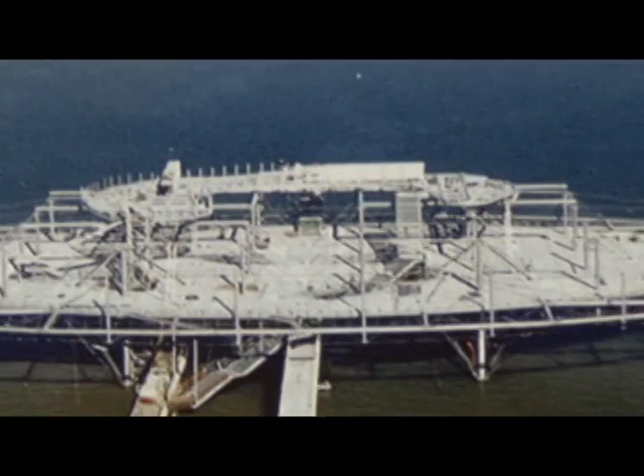Here is the structure, with the platform and the upper platform, which is the angel deck, with two long bridges, one bringing you there, one bringing you back. We built this on 4 columns, and it was super, super lightweight. This was kind of the building module, the fog nozzle. And this is the computer interface. This was really one of the first kind of smart projects that we did.

There was a weather station reading the actual temperature, wind speed, humidity level, dew point, all of that, and thinking in real time about how and where to put higher pressure, depending on the wind and depending on all these other environmental factors. As we taught it how to respond to the weather, it acquired an artificial intelligence.

Blur was a response, basically, to a culture that is seduced by the simulation of the real. We are a very tech-savvy studio, but at the same time we're not acritical. We really look at the function of technology, and in this case there were expos all over the world and World's Fairs that had super high-res, large simulations of the real, and that was a kind of point of pride, I think, technically.

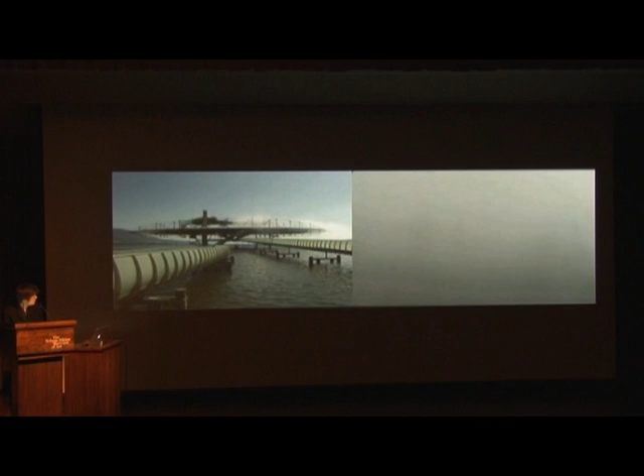So climbing, let's see, this is accelerated on the left, and kind of the sense that you have over on the right, and you occasionally can see a figure that's just emerging and then disappears again.

And you might ask, why? How did the Swiss allow you to build this? Like, why? I keep asking myself that. It was kind of an amazing moment.

When you approach, this project is making interesting contours out of slight shades of white. As you come up, this emerges out of blur, and you come up to the angel deck. It's a little bit like an airplane coming out of a cloud, and it felt incredibly liberating, with blue sky above, and then you could be swept by this cloud bank.

And it kept moving around. In fact, we kept being shut down by the various restaurants because all the food was getting soggy everywhere, and it was very, very hard to control, particularly in high moments of humidity.

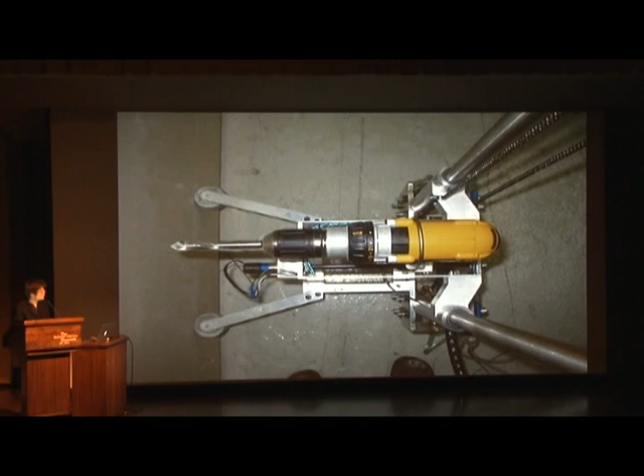And then there was this protagonist, this drill, which was just basically a hardware store drill, but it was put together with a really smart robot. These are the brains of the robot.

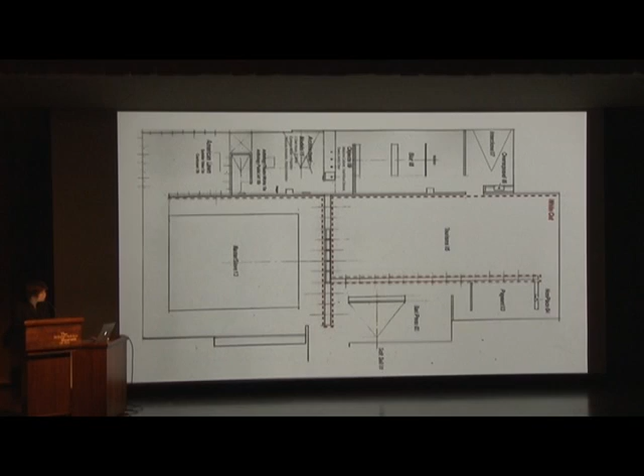This robot basically cruised the space, across wall to wall, around the walls, and it perforated its way through the whole show, and it undermined the integrity of the white wall. So here it is going through the space where Master-Slave is. Watch it in action.

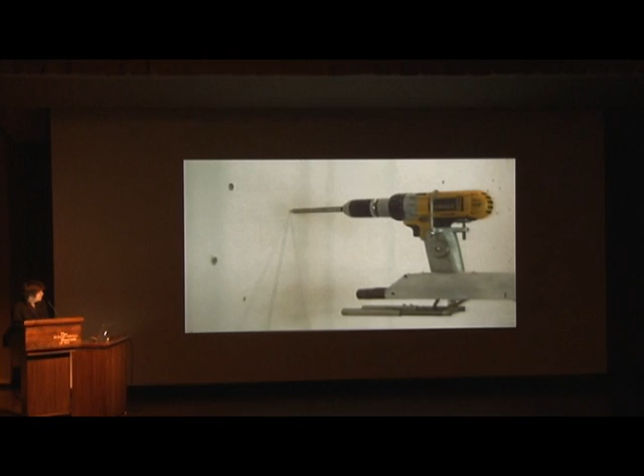An intelligent navigator randomly selected a point in this three-dimensional matrix of coordinates, a kind of mapping of the whole space. The drill moved to that point, pierced the wall, and left a half-inch hole before it traveled to the next location. By the way, we worked with Honeybee Robotics, who did the Mars driller, and we took some of their engineers off of their real work to do this.

This was particularly hard rounding these walls.

Initially, the holes were lone blemishes on these pristine white walls, and as the exhibition continued over 4 months, the walls became increasingly perforated. Eventually holes on both sides aligned, opening views between galleries, and clusters of holes randomly opened up sections of gallery surfaces. So this project was a kind of performance piece during which the wall was made increasingly unstable.

This is the very wall that we critiqued in many of our previous projects when we entered the museum or the gallery. So rather than securing a neutral background, the wall actually competed for attention, and the content of this exhibition was basically a kind of pretext for the subtext, which was this project that basically brought the white wall to light, the authority of that white wall, the acoustic separation, and it created this background drone which was incredibly infuriating.

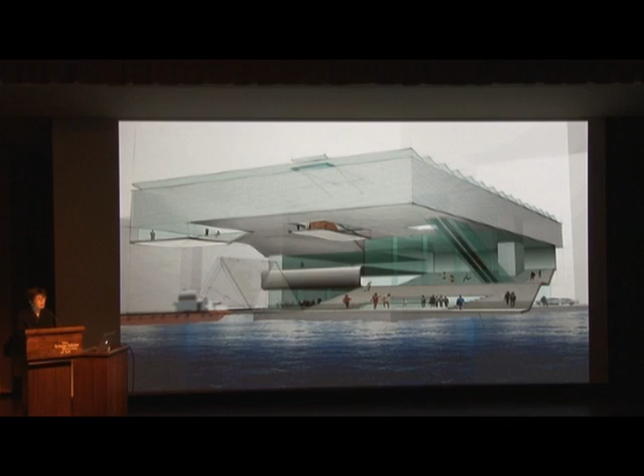Then all of a sudden, we were invited to speak in its voice. It was another one of those very important turning points in the career of our studio, where people of my generation were starting to get into places of power, and it was at that point we said, well, what is it that we are critiquing? They invited us in, so let's make a good museum.

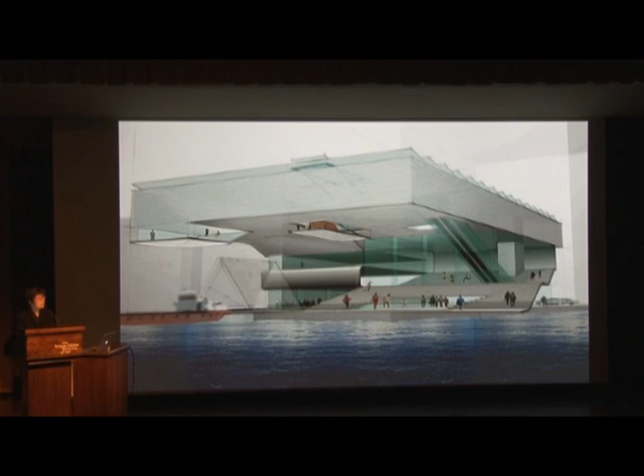So starting from being basically guests to being hosts, we were, for the first time, not thinking about misbehaving. We were thinking about how to make good gallery space, how to make it on budget, and all of that stuff. We think the ICA did turn out good. It was our first try at it.

It was about a 2-year design process, 2 years of construction. The site was on Boston Harbor, and this was the first new museum that Boston had built in 100 years. So it was momentous for Boston. It was in Fan Pier, and it's basically an empty site.

The ICA had traded in their site on Boylston Street, which is very central, and they had an urban site on multiple levels. They really, more than anything, wanted a gallery on a single level. This site wasn't big enough, actually, for it. They got it for $1.

So we did something that was very simple—I won't describe too much, but we basically lifted the gallery, which is this whole thing. It's the size that they needed, and we took it over beyond our site. This harbor front runs all the way around Boston, 47 miles of pedestrian space. We convinced the authorities to allow us to build over that space if we retracted our footprint below and made a space for the public to sit and also penetrate the museum in a different way.

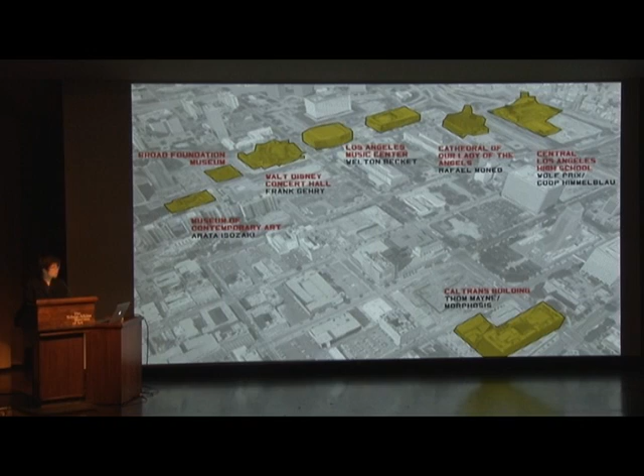So many have doubted that downtown LA can ever be reconciled, and many thought that the ultimate silver bullet in LA's urbanization would be Disney Hall - that the city could regenerate by this building single-handedly. And despite its success, and it's a really great hall, I was really interested to see the Kauffman concert hall as well today. It was a really beautiful hall, and there are many similarities.

This particular building didn't really succeed to catalyze a sense of urbanity downtown, and that poses a problem for our building. Like, what do we do in this context?

I think we realized along the way—our building is just to the left, just out here—that no single building could do it, that you basically have to be optimistic, and that when you do the right thing, and you bring a culture there, and you bring a public, good things will come out of it. And already we're starting to see some real activity.

But anyway, back to the design. So next to Disney Hall, what the hell do you do? This is the most daunting problem, aside from fixing LA. And this is our envelope.

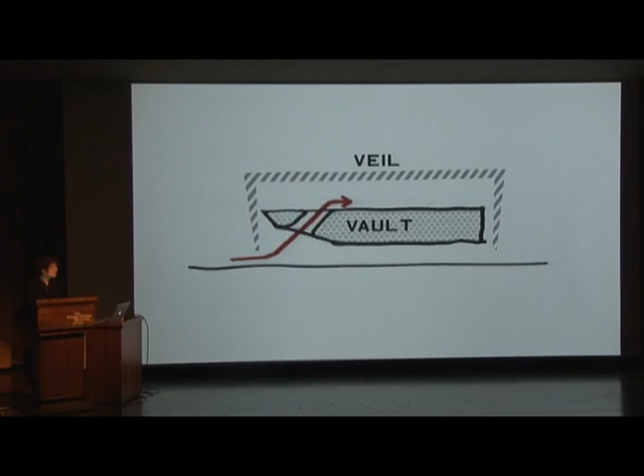We really like the idea of having this like a suitcase that gets unpacked on the surface, and then it gets repacked and put back into the vault and unpacked again in different ways. So there's something really, really interesting about having the collection right there and being able to pierce through it.

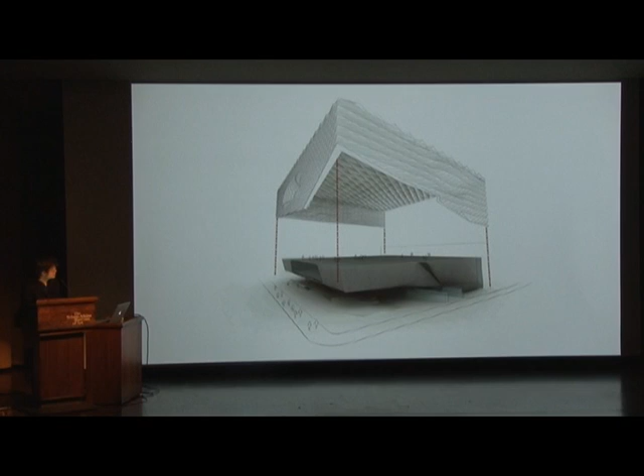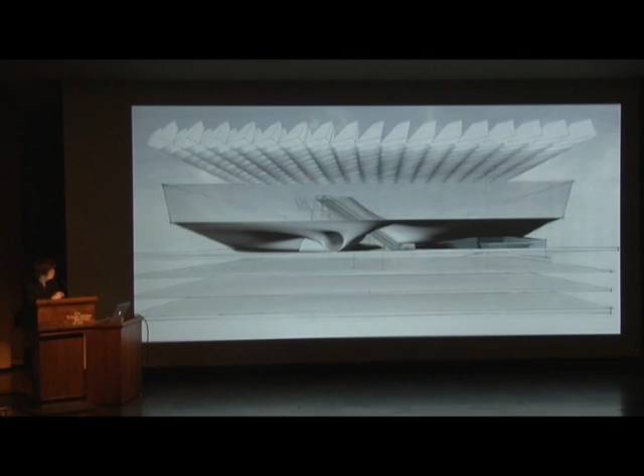So this is the diagram of the vault, and the vault is brooding, and it's solid, opaque, and the veil is all about bringing light and structure down. You could see the articulation is very organic here. This is the escalator that shoots you right through the vault under the skylight system.

And there you go, like bam, and you get up to the top, and that's Eli. I think that gave us the commission, putting him right in the middle of that. He's a man with an ego.

But the making of this vault is extremely complex and involved. First, we thought we could do it just with concrete, stressed concrete all the way, to make these very, very long spans. In the end, we ended up making it out of steel, clad in concrete.

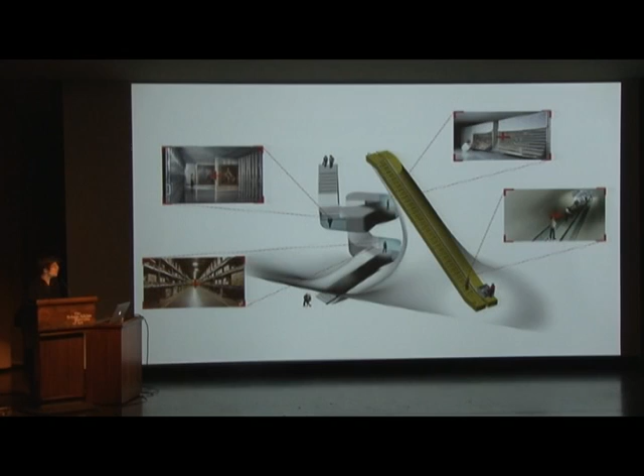This is basically the diagram of circulation. You shoot your way through, and then you come down, and you actually see the pre-curated work on your way down. And so we're interested in, after seeing the exhibitions, being able to understand that this is not a kind of general museum like the Nelson Atkins. It's a collection of one person, one sensibility, and it's really about that collection and that man.

And the outside is that kind of brittle structure. You could see right through it. It brings filtered light in a very, very soft way. This little piece goes right into, it's kind of submerged into, basically a lecture room that's also public.

Here is the vault, and that's that moment of intersection. It's a very hard thing to build.

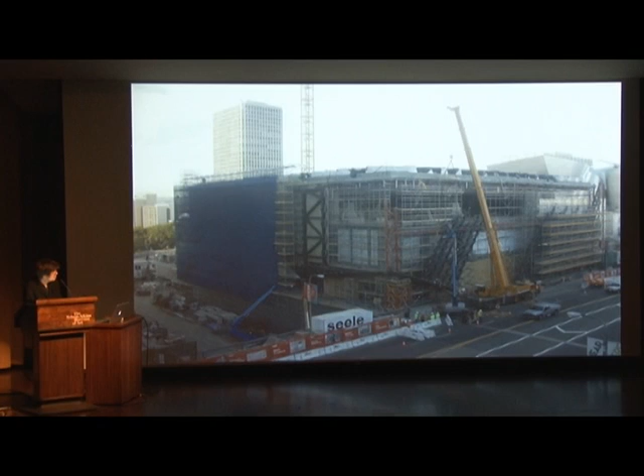Exits is a really important piece for us. It was a contemplation about human migration across the globe. This was shown at the Fondation Cartier in Paris, done in collaboration with Paul Virilio and a bunch of other architects, a statistician, a geographer, and so forth. It's based on the notion that home isn't what it used to be.

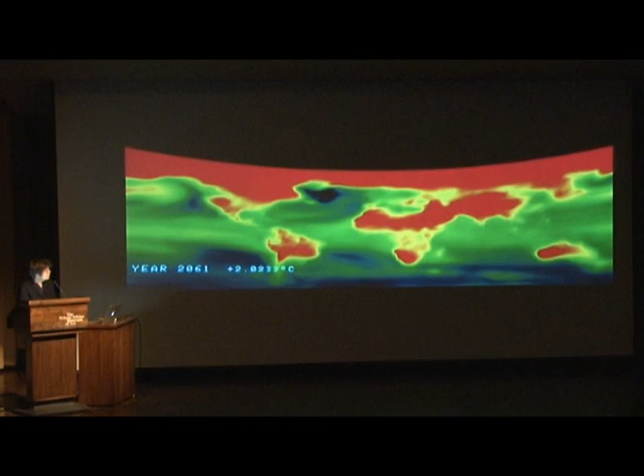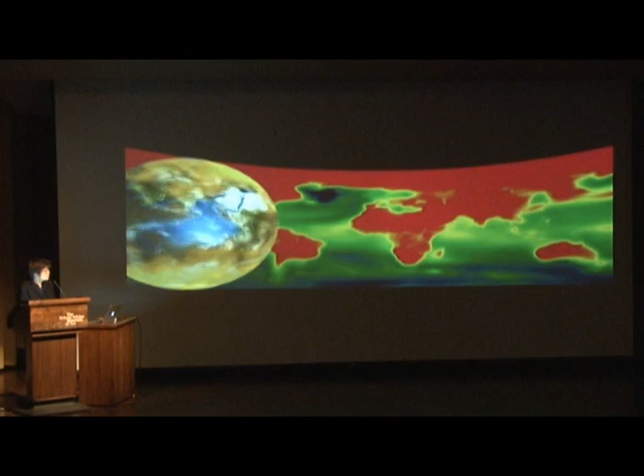This is really the potential of data visualization in the future, that you could see things you can't see with the naked eye. You can't see it even in still maps. But when you start to intersect conditions of politics and policy, environmental conditions, and social conditions, you start to see different kinds of patterns.

Okay, I'm just going to stop it there. Okay, I want to also now move into another kind of work, and this is the work that we've done in New York over the last 10 years. I'm going to try to go through this quickly because I can see that we're not going to make it in time.

Lincoln Center has been pretty much a 10-year project. Lincoln Center was planned in the 50s and constructed — shovel in the ground, I think, was '59 — and it was built out through the early 60s. We were invited here to start on the project, a very, very small project that eventually grew into a much bigger project. These were the guys that originally designed and built Lincoln Center, a kind of collection of celebrity architects. We came in and changed things around with a lot less testosterone than these guys.

The great thing about Lincoln Center is that it did something for the first time: it put all these cultural institutions on one campus. Many people thought that was a bad idea — it would basically create a kind of ghetto for the arts, and that it would be better to distribute the arts through New York. But what they thought was a problem, today we call synergy, and the new leadership of Lincoln Center is really putting all of these players together.

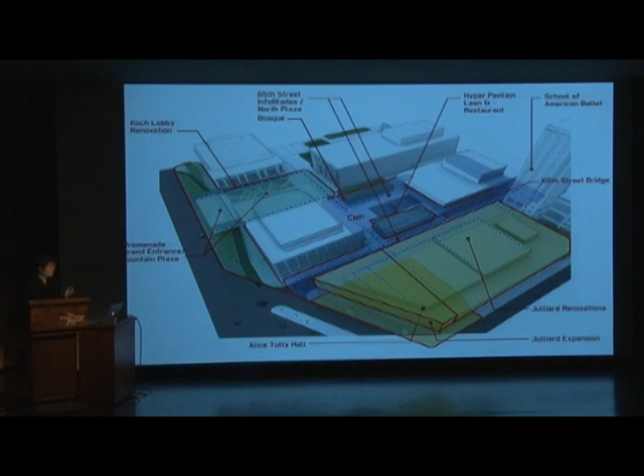Often there was no real program — it was just that we need to do something for the public. So it was kind of interesting working through this project.

I'm just going to show you quickly a lot of before and afters. This is the Juilliard building — said to be one of the great brutalist buildings in the country.

We were able to expand — this is the moment of expansion here, on a triangular site. We were able to extend Juilliard's top three teaching floors by about 55,000 square feet.

This is also an expansion of Juilliard, and here is an expansion of Tully Hall. Tully Hall was always underground, and there was really no lobby to speak of. We put it on display, expanded the lobby, and made it very public — this was super important to us.

And you could see some of the details — we kind of brought the windows across, made blind windows, added an extra floor, and made these strange prismatic windows.

On the other side, while one side was an expansion of the travertine facade, the other side was a kind of sheer cut on Broadway where you could see all of the stuff happening in Juilliard, almost like a section cut through the building.

I was telling this story to Joy earlier today — the students and faculty at Juilliard felt very much like they were in a monastery. They wanted light, they wanted a connection to the city.

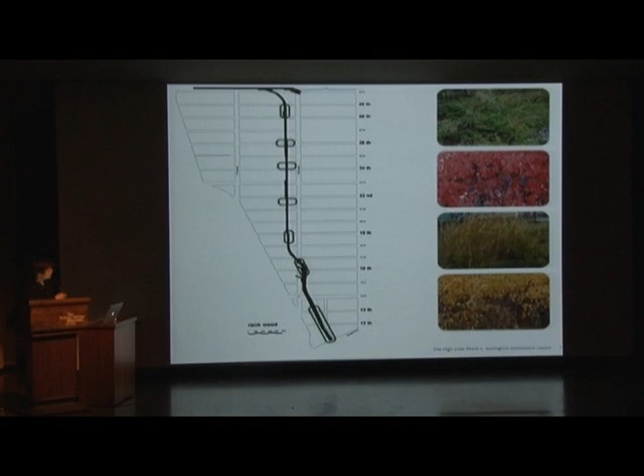What happened was that there were all these different sites, and some of them were windblown, some were surrounded by towers and kind of dark and wet, and some were flooded with sunlight. So there were all these micro environments that happened as a result of this kind of perverse urban condition that was changing all the way for a mile and a half. So you got like 100 different species that took seed there, and it looked really varied and interesting, all these different grasses.

So anyway, when we started to work on it, we were very interested in this opportunistic landscape. Problem was that the ballast was kind of toxic. We had to take everything out, take all the plants out and everything out of there, and we had to remediate the bathtub and some of the steel work and all of that to make it good for the next decades.

And when we did that, we had to figure out, how do we, we could seed it back, we could bring back those species, but how do we bring the public up there without ruining it? This was a big problem. It's very often very narrow there, maybe 24 feet in areas, even 22 feet. How do you avoid doing this — just a path and vegetation, which is the kind of obvious thing to do?

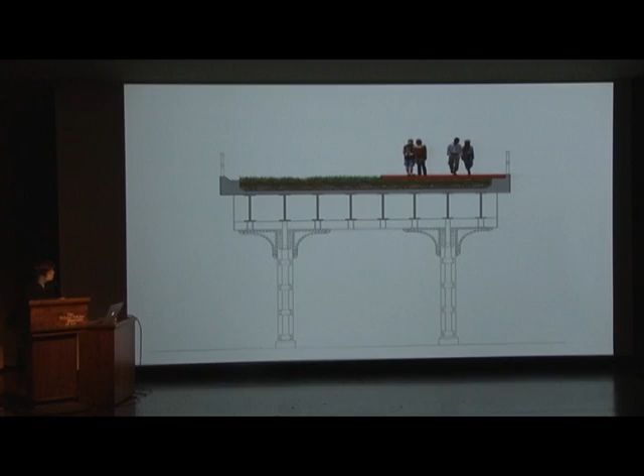So we got our stimulation, and by the way, I have to mention James Corner and Piet Oudolf, our collaborators on this. We were very stimulated by the way that these kinds of natural decay cycles happen in nature — overcoming culture, overcoming nature, overcoming culture — and could we reproduce something like this?

So we came up with this new paving system made of concrete pavers. They were very long and skinny, had tapered ends, which could comb into vegetation in different ways. We could assemble these pavers in different degrees to produce 100% hardscape to 100% vegetation, and any gradient in between.

We were also very interested in preserving the kind of melancholia of the site. We didn't think it was necessarily possible, but there was something very beautiful about this post-industrial site that had seen all this kind of change, this change of New York. How do you preserve that? How do you make up a place from which to see New York, where New York becomes on display?

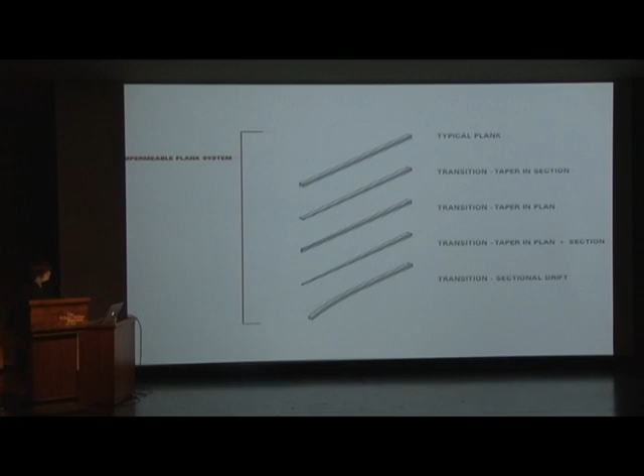These are some of the planks, there are many different types. You can see here that the language is very simple. Here are the planks, the way it kind of filters into vegetation, some of the tracks brought back. The language of the concrete pavers becomes the benches, the existing guardrails become the source of light. It's a very light touch.

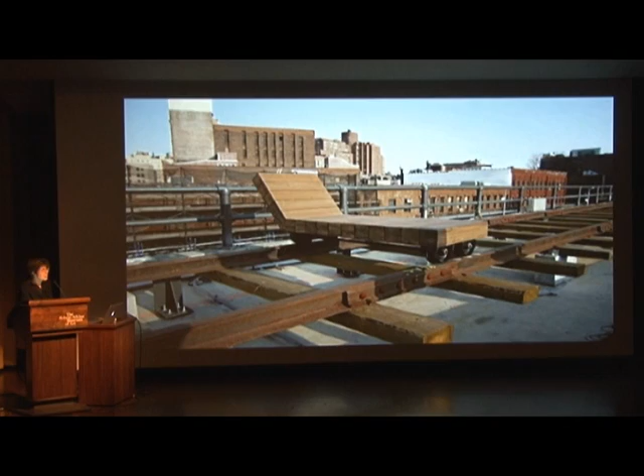Sometimes we use the tracks in a post-industrial way to create movable lounge chairs here. And this is the entrance—there's a slow entrance. We thought of our entrances in speeds rather than types, so there are slower ones and faster ones. Here you could see the blunt cut where five blocks were removed.

I should say that when the Friends of the High Line, these two young guys, argued to keep the High Line and transform it into a park, they argued it could be a catalyst for development, much like the way Central Park was a catalyst for development above 59th Street. The last act of Mayor Giuliani's administration was actually signing the court order to demolish the High Line, and I would really love to talk to him now to see how he feels, because he really thought it was worthless.

But fortunately, the Bloomberg administration came and turned the court order around, allowing the team to reconceive the space. New York is not very progressive when it comes to parks, and we had to argue for a park 30 feet in the air, where you had to rethink everything—garbage removal, security, snow removal, all of that—which no one could really compute. How do you do that? This particular park couldn't have happened without that administration. It was a great administration.

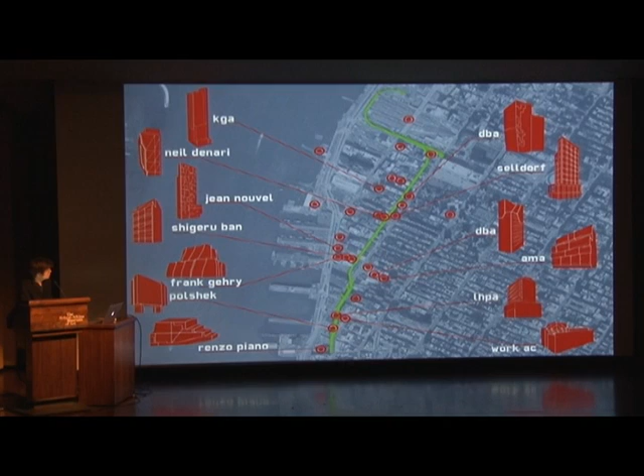These are some of the buildings coming up around the High Line. This was maybe a year ago. There are many more today, and the High Line has gone viral. This is something called the High Line effect. I understand these High Lines are proliferating all over the world.

Here are just a few—we're collecting these. Actually we're very pleased, because what happened is the Promenade Plantée preceded the High Line in Paris, but it was kind of unnoticed even by Parisians. Something about the High Line really captured the public imagination and became extremely popular. It has to do with where it is, really—it's like the perfect density for the kind of sense of decay and rebirth on that site, which is so palpable.

Every city is trying to produce a High Line effect of their own using infrastructure, and that's a very, very good thing.

I'll just show this one detail. This is a moment where the High Line crosses diagonally, going from mid-block across 10th Avenue and back to mid-block—this is one of the spurs. What we did here was cut out the steel underneath and replaced it with glass, like that, making one of our signature moves: a place to sit, a little viewing area, a viewing platform.

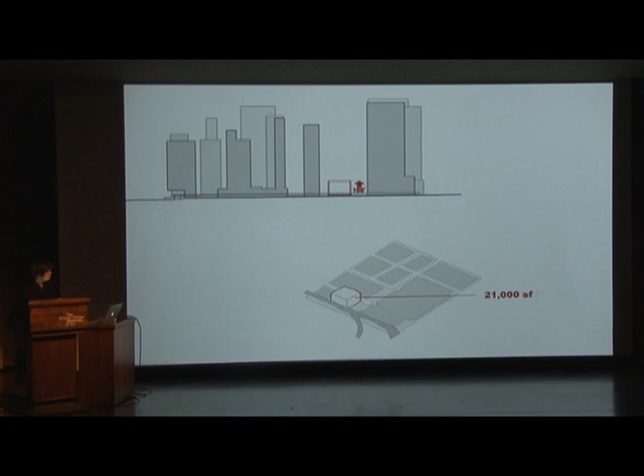What does New York not have? It has so much culture, but it doesn't have a venue that's truly multidisciplinary, where visual arts and performing arts can be in one place, purpose-built for that. It does not have a really truly transformable space that's scalable. It doesn't have an unbranded space like a Kunsthal where work could come in. Right now so many shows go right past New York and don't stop, because the institutions are so heavy, and it takes so long to get into an exhibition cycle, one could never get in.

It doesn't really have a self-sustainable place. We thought about this after 2008, and realized that in the financial crisis, where philanthropy is drying up and there's no money from the government, why shouldn't a new cultural institution be financially self-sustainable? How would it do that? And unbranded - twice as unbranded.

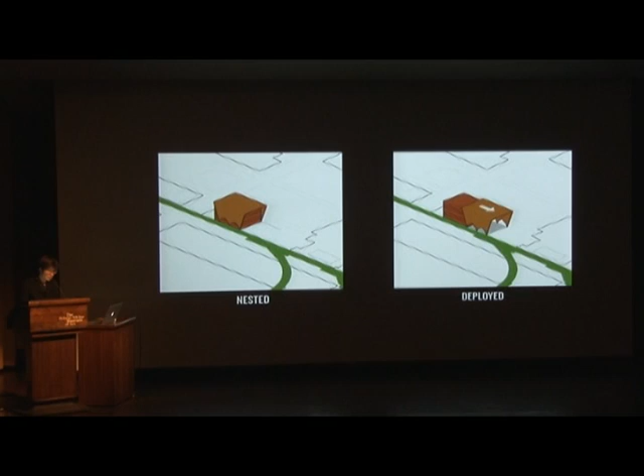So how does it do this? Very, very simply: it's a base building and a deployable shed that doubles its footprint. By doubling its footprint, we can have super large shows, but we don't have to have it deployed all the time. We don't have to heat and air condition it - we only put it out when we need to. And one of the needs could be for income-producing events.

How does it really work? It works with industrial technology, gantry crane technology. So this is basically 3 levels of galleries, about 13,000 square feet each, column-free, with a rooftop bar, and this deployable shed.

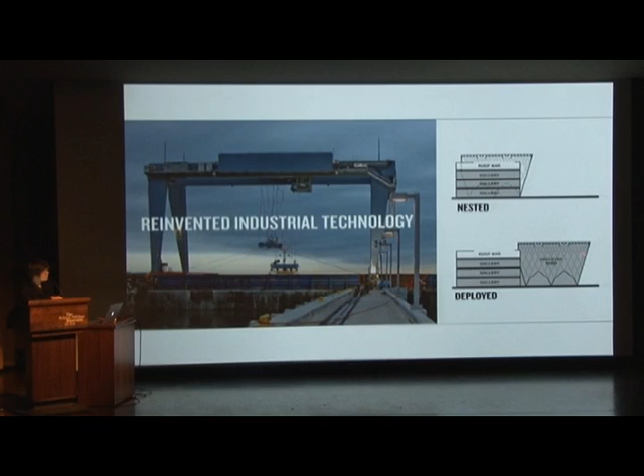And it docks into a 75-story building, which we are also doing, along with our collaborator David. The shed basically docks into that building.

Our core, our mechanical space, and our offices are in the lower portions of this building. So we're able to make it dependent. These two buildings are kind of interdependent, and we're able to get more space.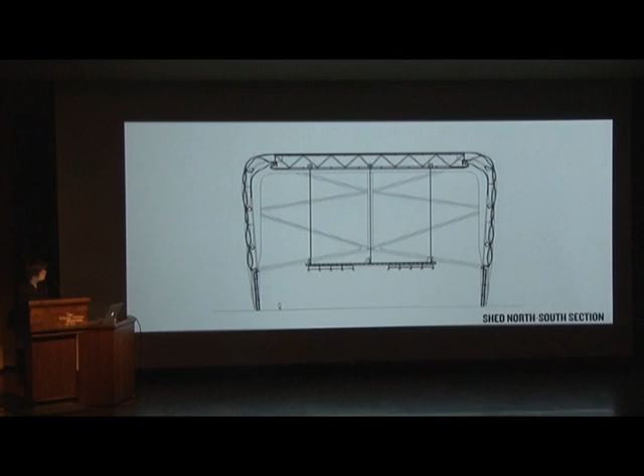The span that it takes to cross this site becomes the technical ceiling of the building, and we could rig it in any number of ways. So we have this very large space that's infinitely flexible, that has strong points everywhere, where basically it's super low tech, and the infrastructure could be ripped out at any moment and updated. But it's got something that's very precious in New York, which is space. It's really just about preserving space and making more of it, and making it adjustable.

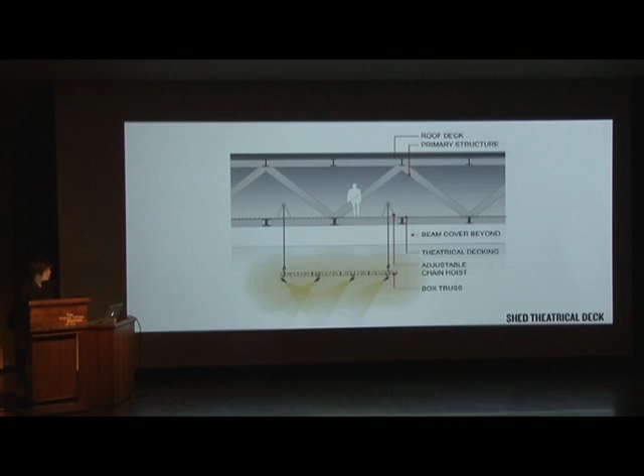So there's just some plans and sections. I'm just going to get to the programming. So this is what it's about.

It's exhibitions, performances, public events that are both produced, co-produced, and presented in relationship to income-generating events like galas, fashion events, creative industry events. Creative industry is very important, and we don't see a real high-low between visual arts, performing arts, and creative industry. We kind of embrace it, and we unashamedly say that we can find a really good alliance with creative industry to produce income-generating events, like art fairs, auctions, concerts, film festivals, and such.

So we brought this idea to the city. The city really embraced it and helped us a little bit in a formative time where the idea was being tested. We were modeling it in terms of a business plan. Eventually the city and the creative industry totally embraced it. Now we're just about to start construction documents. We've raised half of the money already. We're an independent, not-for-profit organization, and we've changed the zoning around the site. We've been able to really produce this very new...

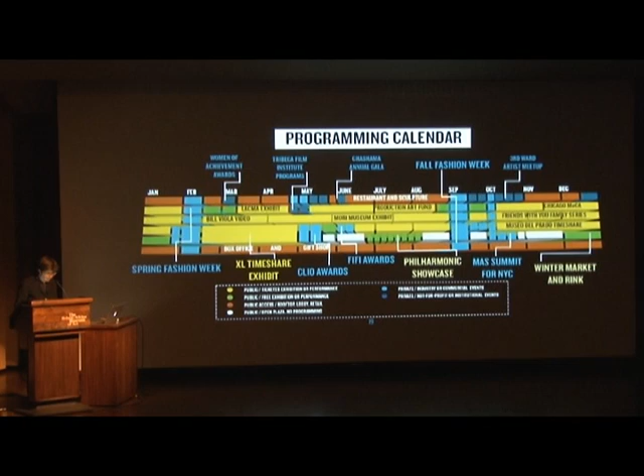So what I wanted to close by saying is that rather than just designing a new cultural institution, in this case we really wanted to do something alternative that wasn't top-heavy, that grows out of the needs of artists and the decreasing supply of funding. This new initiative produces a kind of new paradigm of cultural entrepreneurship that really makes sense at the beginning of the 21st century.

And already, as we've shown this project, other cities are saying, well, why don't we have one of those? Because it totally makes sense, especially in America, where there are very few places that are really unbranded. This will eventually be a brand in itself, but it's not a Guggenheim, it's not a MoMA, it doesn't come with a heavy legacy.

Bloomberg, the Bloomberg administration will be out, but the city just recently announced a $50 million gift to the project, and we're well on our way fundraising. The Culture Shed will open its doors end of 2017, beginning of 2018. Thank you.

I think as it's so late, I won't take any questions, but I see everyone's stomachs are churning and ready for dinner, so thanks all.